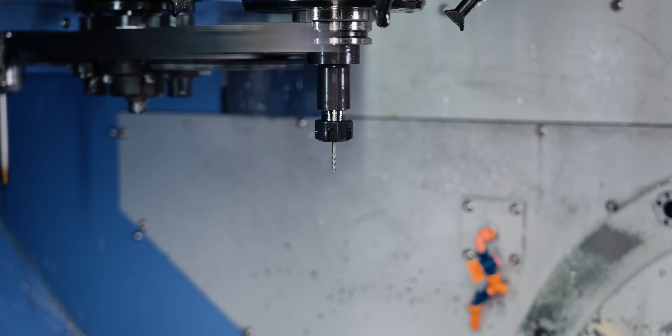What this tool is about to do is going to blow your mind. A lot of machinists are going to look at this feature in this part without watching this video and be like, how the hell did you do this?

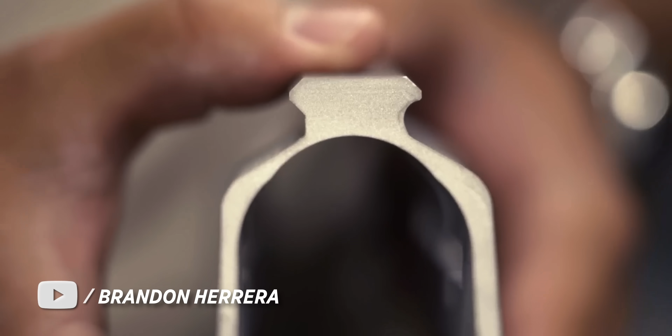This is a cautionary tale of what happens when you don't work with titans of CNC. Look at that perfectly symmetrical Picatinny rail. That's probably usable for something, I guess. Also, the difference in wall thickness side to side is kind of staggering. These cuts are there for a reason, and they're supposed to be in line with each other. They're not. This is potentially usable. I wonder why AK-50 takes so long sometimes? Shit like this. Well, I guess you know what we got to do.

Oh shoot, I still got a program.

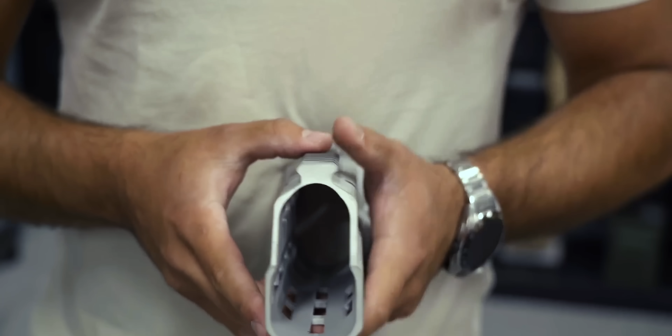Well, as you just saw, the handguard that Brandon has for the AK-50 project is, well, let's just say it's not going to work. So we're going to help him out by making one here on our DVF 5000.

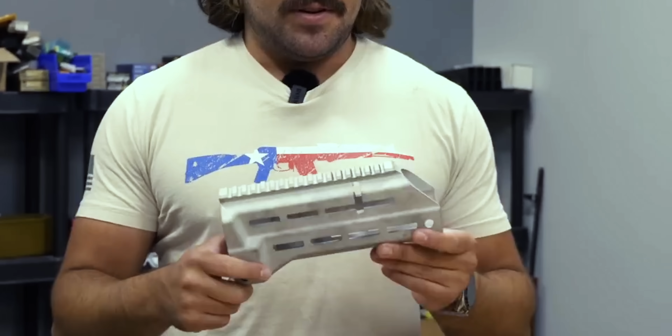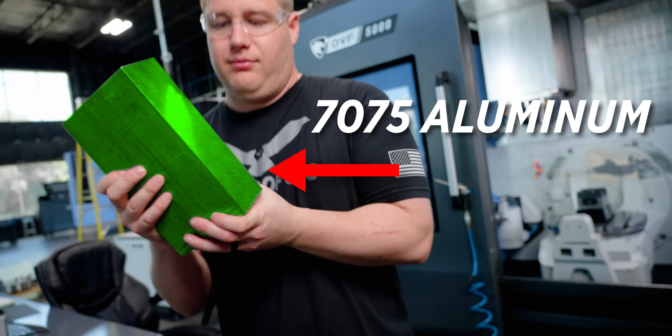Now, when it comes to handguards, this thing is huge. I mean, look how massive this piece of material is. And this handguard is a lot more complicated than your traditional handguards, because normally you're buying these out of extrusions that already have a hole through them and you're just finishing the outside. But this one, we're going to make it out of a solid billet of 7075 aluminum, which is not as easy to get as 6061.

And this handguard has a lot of thin walls, and just the sheer size of it means we're going to have a lot of long tools. We're going to have to really pay attention to our feeds and speeds, otherwise we might end up with a lot of chatter in this part.

This is exactly what I was afraid was going to happen. Dude, you might as well cut, because this is not good.

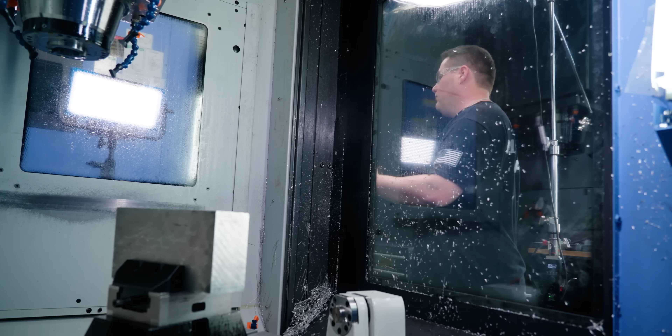So the first operation here is just a material prep operation. We're going to deck the top and the sides. Go ahead and put a dovetail on it.

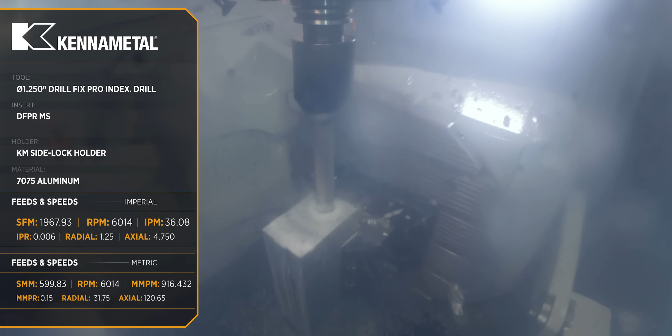Then I'm going to come in with a Kennametal Drill Fix Pro, and I'm going to do some chain drilling to get rid of the bulk of the material on the inside of the part. Now, we're using the Drill Fix Pro because of its centering capabilities. Most indexable drills don't have really good centering capabilities, but the way the insert is designed on the Drill Fix Pro, it allows it to center itself really well, making it good for chain drilling.

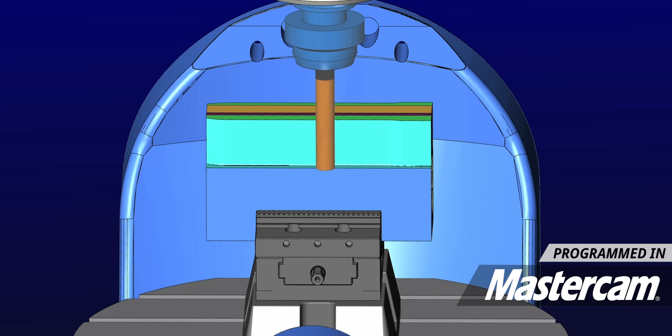So after our drill runs, we're going to come in with a KOR5 and rough the outside. Now, this is just a basic roughing pass. We're just going to get rid of the excess stock that's going to be around the vise for Operation 2, so we don't have a lot sticking up for when we start tabbing the part. So after this tool runs, that's going to complete Op 1.

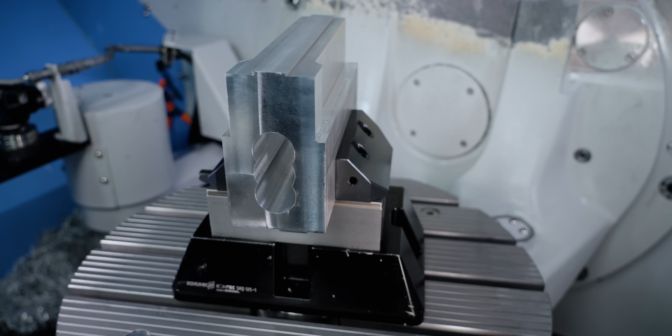After that, we got to take this piece out along with the straight vise jaws and replace them with the serrated jaws. Then we can put the handguard back into the machine, holding it onto the dovetail.

Dude, what are you doing? You're the camera guy, get out of my shot. Yeah, anyway.

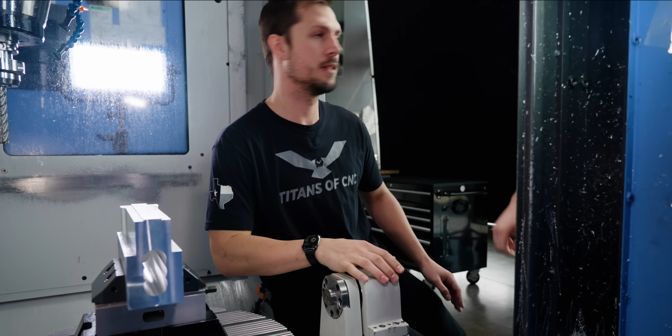Yeah, what he said. We're going to start Op 2 now.

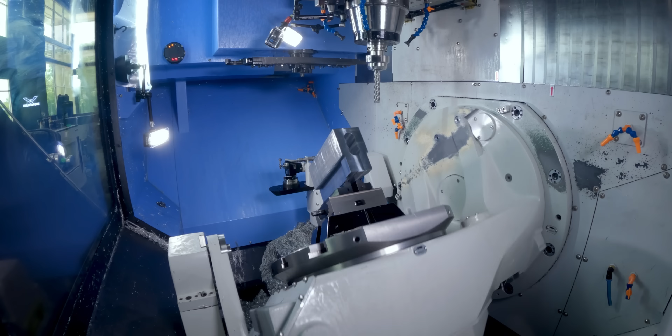Now we're going to start this out by using a 3/4 inch KOR5. Now, this is a 5xD tool. And when it starts roughing the inside, we won't be able to get all the way through, so we're going to come in from both sides and get as much as we can.

Next, we're going to come in with a 3/4 inch duo lock that is sticking out 7.5 inches. Now, we've got to be very careful with this tool because it has a steel shank, so harmonics can build up very easily. That's going to start vibrating the tool, and it's just going to bounce off our material if we're not careful.

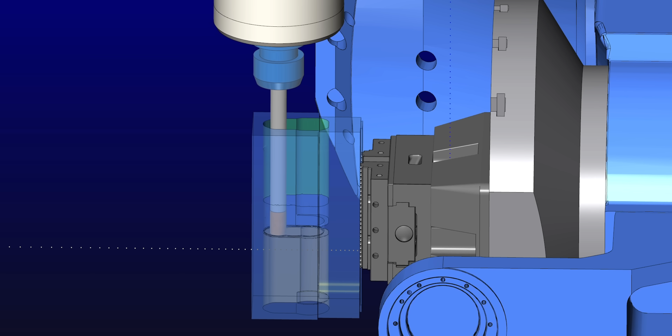Now we're going to drop in and rough away that material that our KOR5 couldn't reach. Normally we always tell you to rough everything before you do any finishing work, because something might end up moving. But in this case, we've got a lot of thin walls, so we're going to rough and finish the ID before we ever touch anything on the outside.

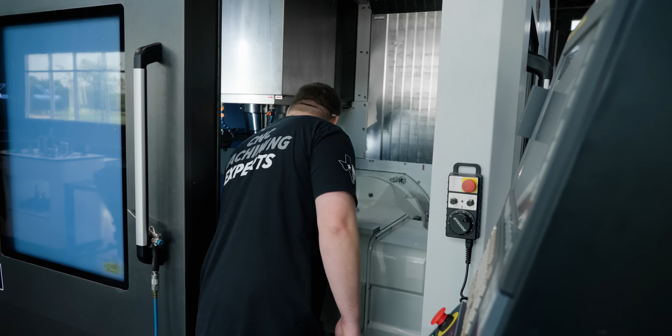This is exactly what I was afraid was going to happen. Dude, you might as well cut because this is not good.

Oh, don't you just love it whenever your boss takes in a job and he's like, oh yeah, we're gonna make this thing perfect, we're gonna hit all the tolerances, send it to us, we got you. Knowing good and well the whole time they're gonna give it to you and it's gonna be your headache to deal with. That's kind of what I'm dealing with right here.

Luckily I've got a machinist for a boss, so I'm about to enlist his help because what I'm dealing with here is typically you could run this tool at 15,000 RPMs, no problem. But the projection on this tool is so long that we're dealing with a lot of harmonics, a lot of chatter. As you can see, this thing looks awful.

Now I called Barry over here and he said he didn't see nothing wrong with it. He thought it was just fine, but we both know that's his signature pattern, so of course he wouldn't see a problem with it. So I need to go get him and see what he thinks about it.

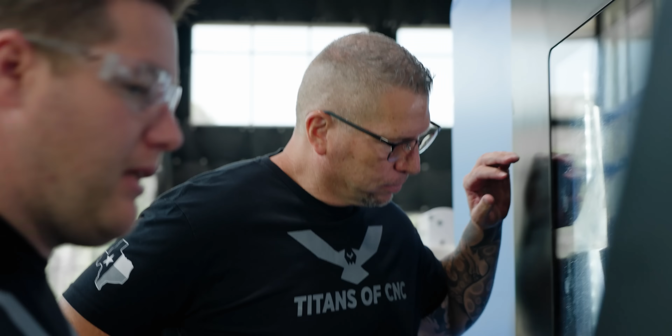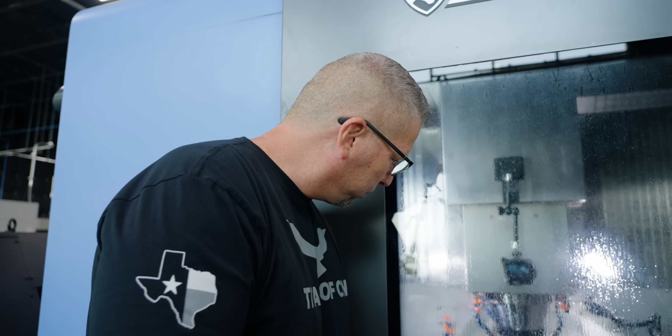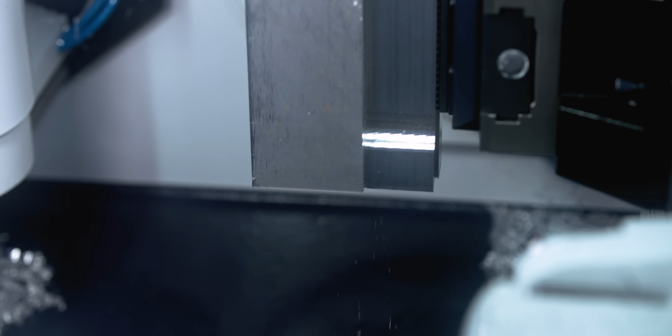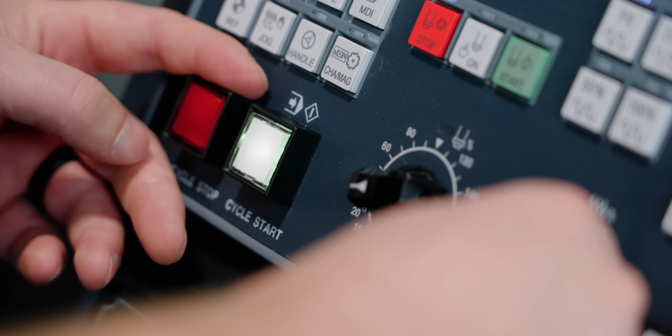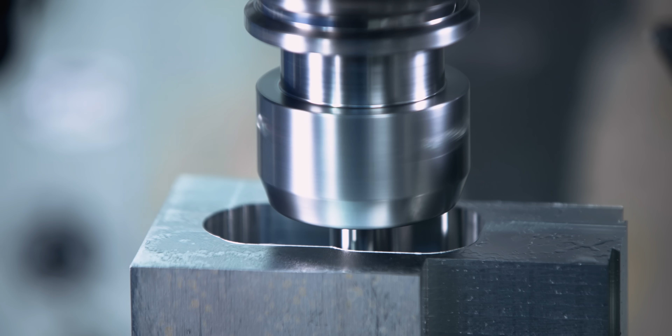Okay, now the ID is finished, we finally made it through that. It's looking really good, but we're not out of the woods yet. Now we have to rough the OD. This is where we're going to start revealing those thin walls, everything's going to get super thin. So when we start finishing this outside, it still could chatter and ruin everything that we've done up until now.

Now that the KOR5 has roughed the outside, now we're going to call up a 3/8 tool and start finishing everything.

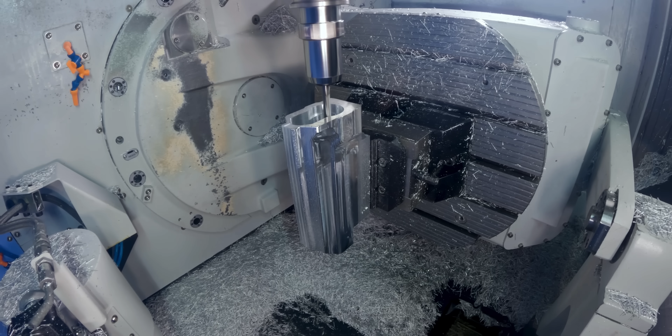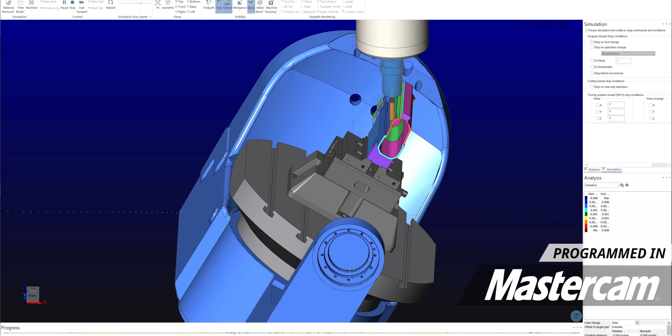Now coming up, we've got a very difficult feature to machine that's going to have several challenges to it. This is where CAM software can make or break you, especially when you're programming on a 5-axis machine. I've got to hand it to Mastercam - I love the direction they've taken their multi-axis modules, because not only are they extremely intuitive, they give you several options for machining strategies. Normally you don't have that luxury when something is that intuitive.

So for these pockets and holes on the face, I'm going to come in with a small drill and drill those out just to get rid of the bulk of the material.

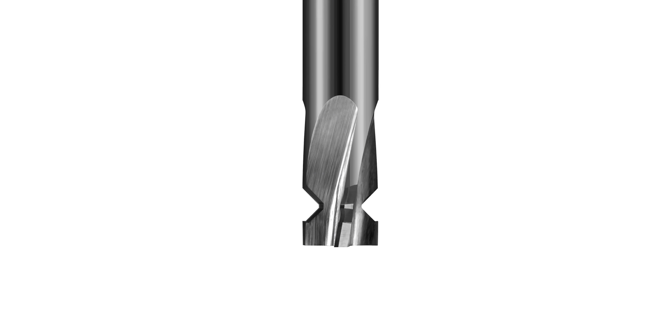Next, we're going to come in with our Picatinny form tool. We could do this with multiple tools, but it's easier, and I know the shape is going to be correct if I go ahead and use a form tool. That makes it so I just have to make one pass down each side and that whole Picatinny rail is complete. All right, next we're going to come in and finish our holes, rough our slots, and do the grooves that's on top of the Picatinny rail.

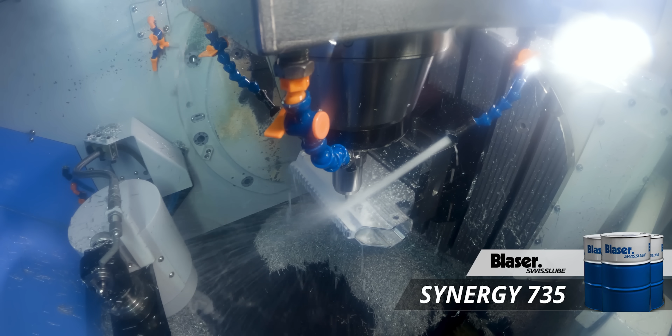Now for this, we're using a 3/16 end mill that is necked back 1 inch. I like to use neck tools whenever I can because it makes the tool so much more rigid. We don't need that whole length of cut, we just need the reach, so in order to keep it as rigid as possible, that's where neck tools really shine.

All right, next we're going to rough and finish those pockets in that face. Now these are just weight reduction pockets. They're not really doing anything.

Next, we're going to call up a 1/4" ball nose, and it's going to finish some of these angled walls and fillets that the 3/8 tool couldn't reach. The 1/4" ball nose can't reach everything because of the design of this, so we're going to come in with a 3/32 ball nose and finish those areas that the 1/4" couldn't reach.

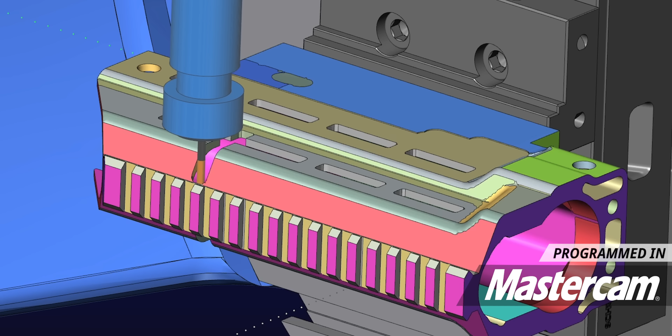So now we're going to come in and finish these slots, which are designed for the M-LOK accessories. Our tool is an 1/8" tool that's hanging out a little further than we wanted to, and that's because this one vertical slot is actually all the way through the part. So we had to stick this tool out a little bit far in order to get that length that we needed for that. So we're going to have to slow things down just a bit to make sure that we don't get any chatter on these slots.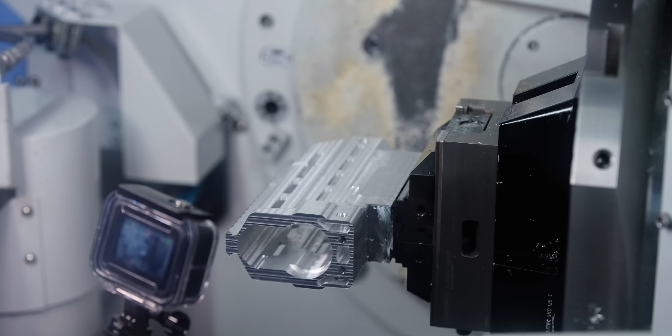What this tool is about to do is going to blow your mind, because the pocket that it's doing is otherwise impossible. And a lot of machinists are going to look at this feature in this part without watching this video and be like, how the hell did you do this?

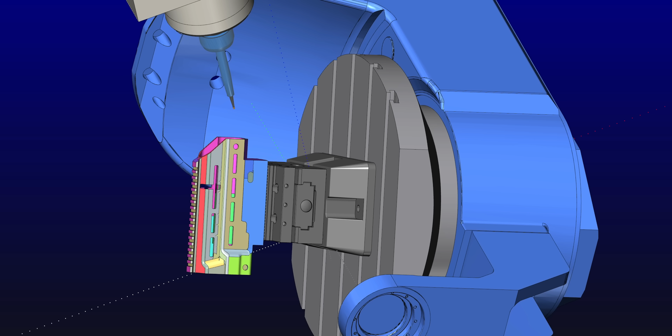I'm going to turn on my transparent mode so we can actually see what's going on with this tool. On the back side of this part, on this angled wall, there's going to be 2 more slots, but these M-LOK accessories need a certain wall thickness. And because of the shape on the inside, we've got a big fillet coming into where that wall is.

So we really need a flat in there to make sure that wall thickness is correct. So to do that, they've added these pockets. Well, the problem is there's no way to do those pockets unless you do them with a key cutter. The problem with a key cutter is the pocket width is wider than what the head of the key cutter can actually reach, because you would have to go through that slot.

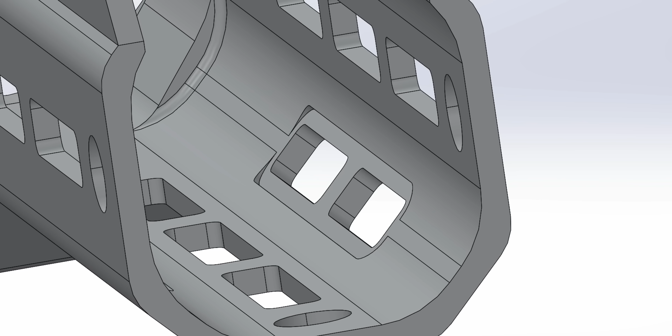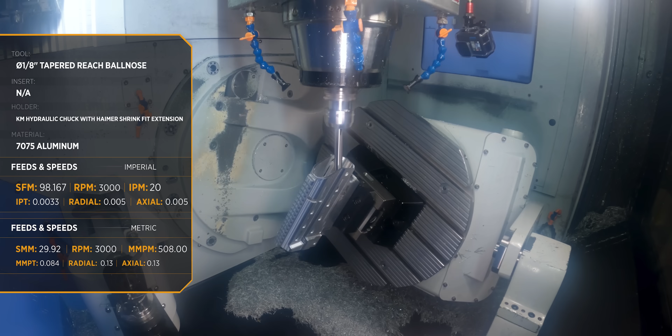So what I did is talk with Brandon and their team about, instead of making this a square shoulder pocket, why don't we add a radius all the way around? That will allow me to come in with this 1/8" ball nose, and as you can see, we're just coming in with vertical passes through this end, and utilizing our 5-axis machine, we're able to put this feature in the part that would otherwise be a real pain to figure out how to do.

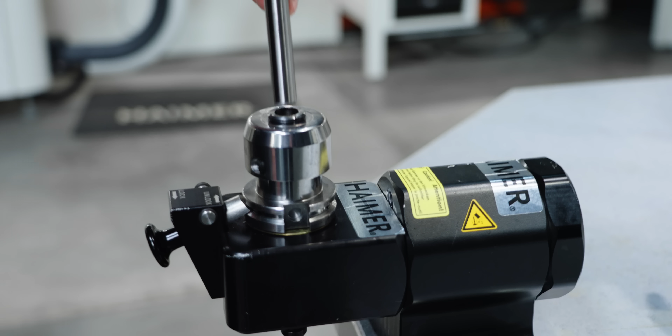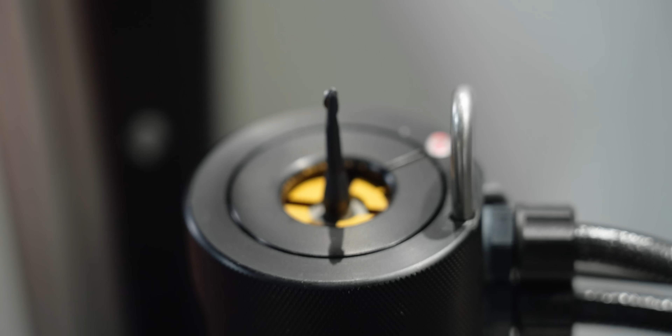Now, another thing that's making this possible is I'm using a Haimer shrink fit extension. Now, I love using these shrink fit extensions because not only can they go into other shrink fit holders, but they offer you a very slim design that allows you to get into tight reach places like this, which you're always doing on a 5-axis machine.

So as you can see, this holder is getting extremely close to the edge of this part, but we're able to stay away from that, and we're also able to reach deep inside the part.

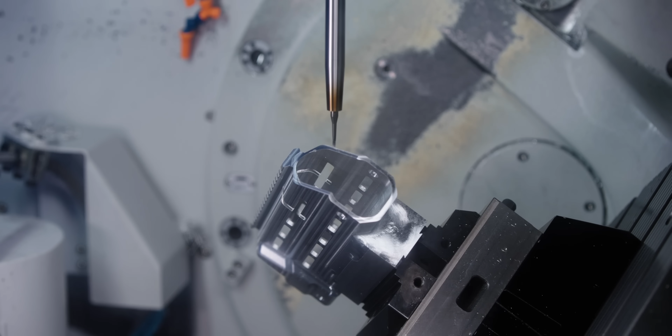All right, next we're just going to take an 1/8" chamfer tool, and we're going to chamfer everything that it can reach on the outside of this part.

Next, we're going to come in with a lollipop tool, and that's going to chamfer the back side of our slots. Because if you've ever worked with me in the past, you'll know that I do not like to deburr anything. So this is going to make sure that when this part comes off the machine, everything has a chamfer, everything is deburred, and I'm not going to have to do any manual work to this part.

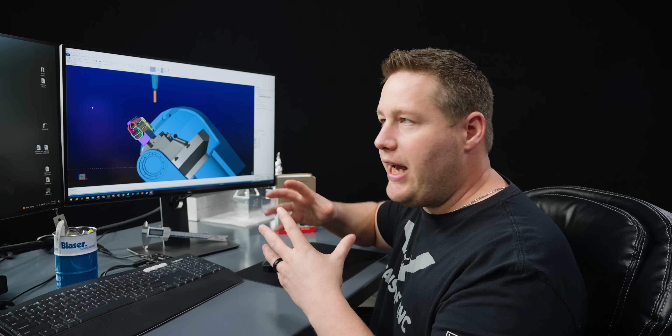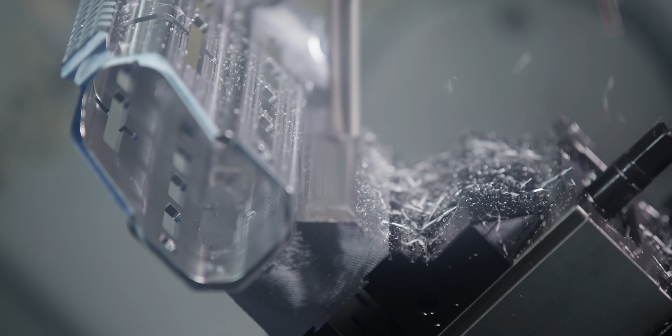So now that we have everything finished on the top side, now we can start roughing away this material that's on the back side of the part. Now, we've left that on here this whole time to make sure that we have rigidity in this part when we're finishing all of this stuff on the top.

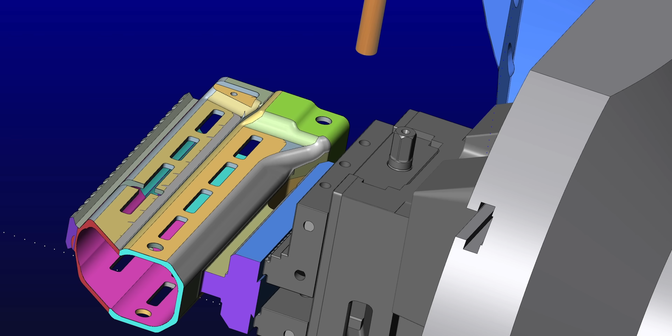But we're not going to take it all the way what we should. We're going to leave some there to make it rigid for when we finish this angled wall. We want to kind of take this down in certain sections. That way we still have rigidity, but we get this entire back wall finished. So once we've rough and finished as much as we can on the back wall, we're going to come in and make a slot in the center to reveal our 2 tabs.

Once we do that, the only thing left to do is come in and make these tabs to the thickness we need to break this thing off. For that, I'm making it 30 thousandths thick. After we do that, Op 2 is complete, and as you can see, we've almost done this entire part all in one operation.

Oh man, this thing is looking amazing. I'm not gonna lie, if Brandon ends up anodizing this, I'm probably gonna get my feelings hurt a little bit.

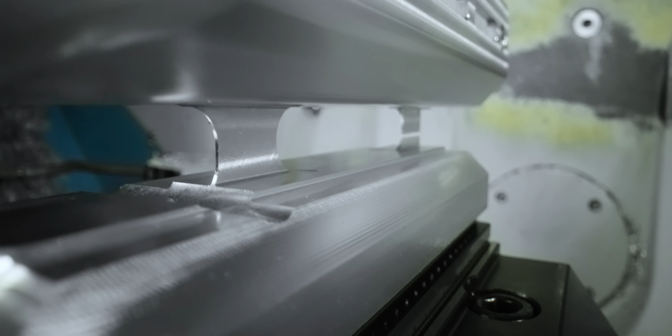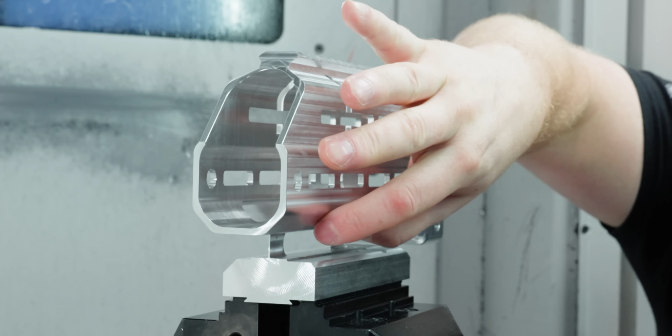We were able to use the tabbing method from my previous video to get pretty much 99% of this part complete. The only thing left is the M-LOK slots on this back wall and this angled wall. But as you can see, we've got that 5-axis wiggle going - check this out. We're only holding on with 30 thousandth thick tabs. That's all that's holding this part on.

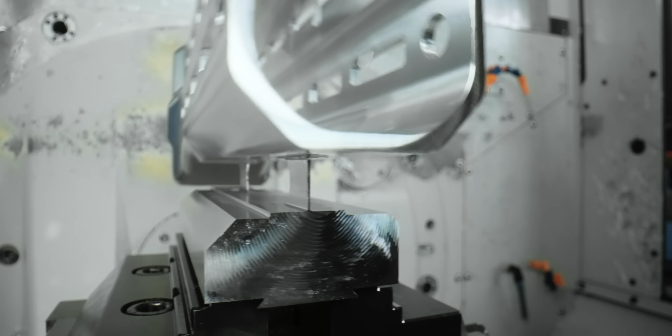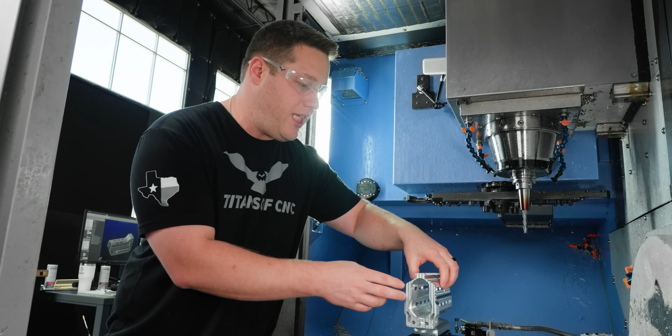So for this third operation, I'm gonna change these jaws out and hold on this wall right here. But we've got some super thin walls here and I don't want to crush my part. We need to make a block that slip fits on the inside of this to keep the vise from crushing our part. I want that to be a good slip fit - not too tight where it presses in, but not too loose, because then the vise can start distorting our part.

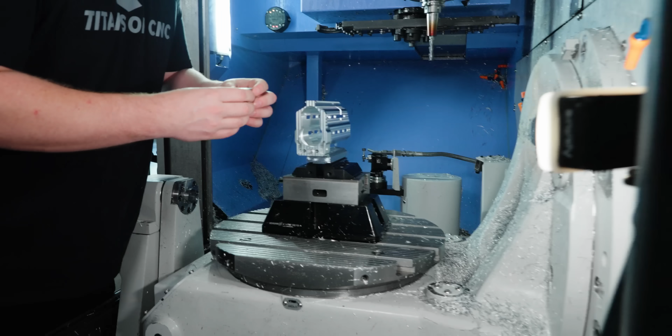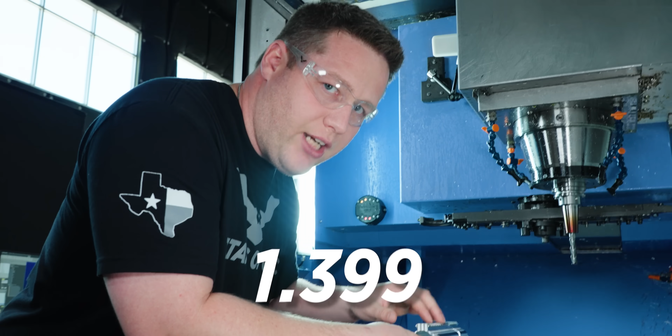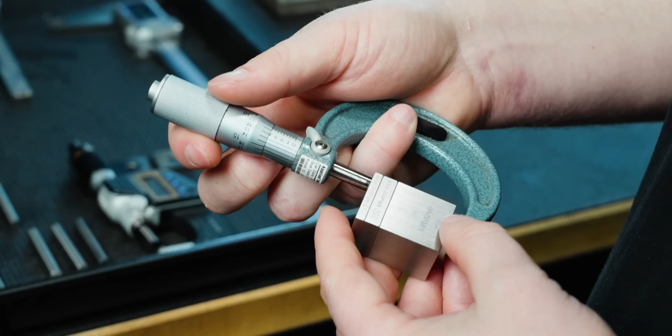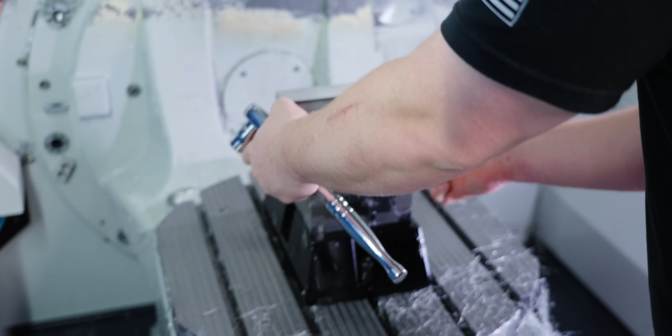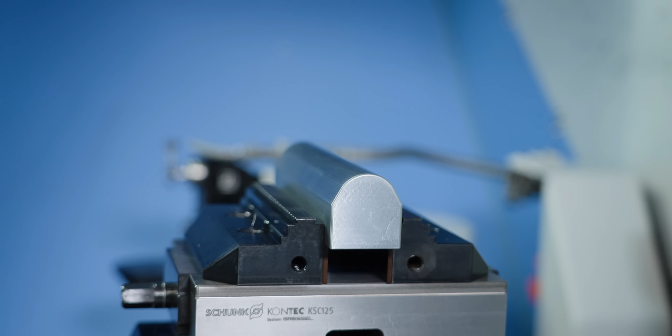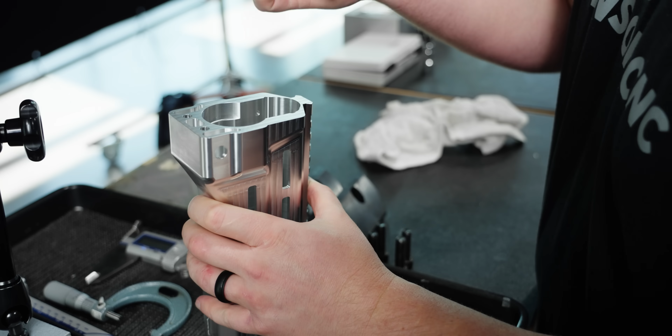Now we're going to check how this fits in our part. It's a good thing we ran that lollipop cutter, because otherwise we'd have real trouble getting this to work - we'd have burrs all down inside of here. Just going to slide it in like that.

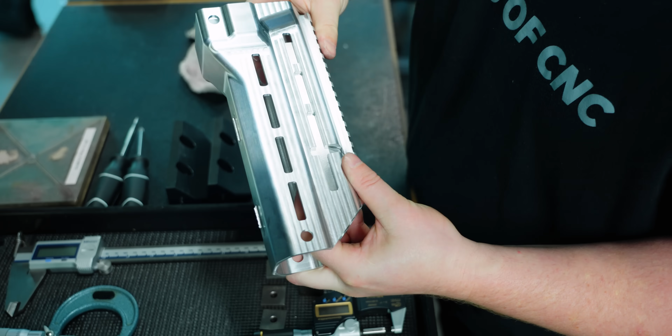As you can see, it sits right inside of there. There's really no play - I don't feel it wobbling back and forth, so that's good. It's a nice slip fit inside this bore, so now when we clamp, we know we're not going to crush our part or distort it, so when we start machining on this side, it's not all oblong and distorted. Now we're going to get these jaws changed out on our vise, get this last operation done, and get this part shipped.

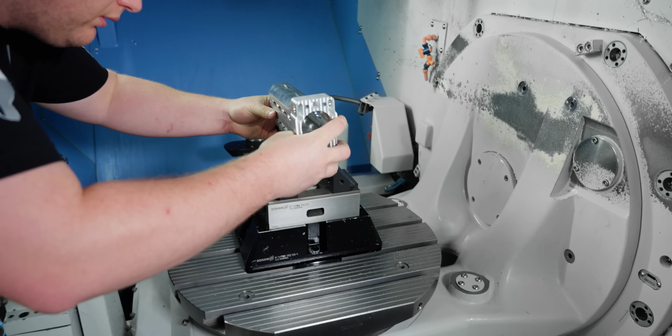For Op 3, all we've got to do is come in and do some more slots and this one hole. We're going to follow the same exact process we did on Op 2, but this time I don't really know how much it's going to chatter because everything is so thin, so I'm not going to get as aggressive with it. And this part is done.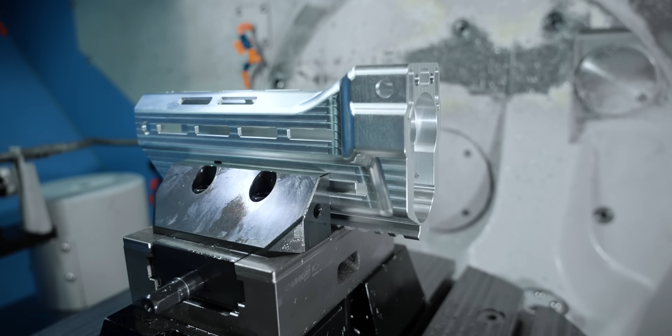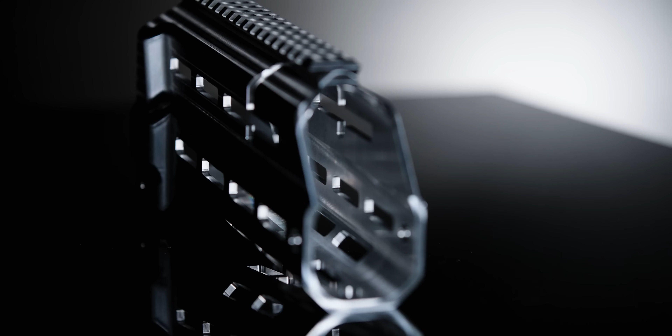Making this handguard has been extremely fun, but it's been a little bit stressful because this part being so big with these thin walls and long tools, it hasn't been the easiest to get good finishes that we normally get. But overall I've had such a fun time making this part.

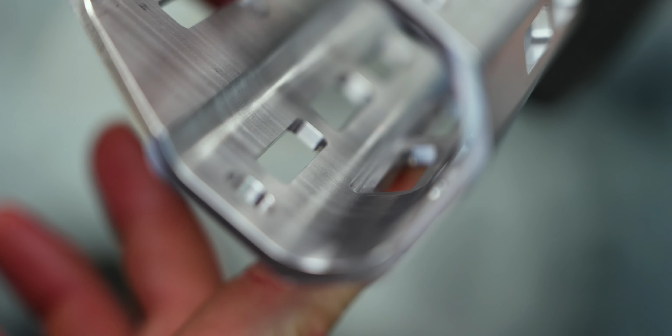Dude, check out these internal pockets here - those came out so nice. I'm really glad I was able to put those in there, because Brandon wasn't sure if we'd be able to do it or not. I'm really glad we found a way to be able to put that in there.

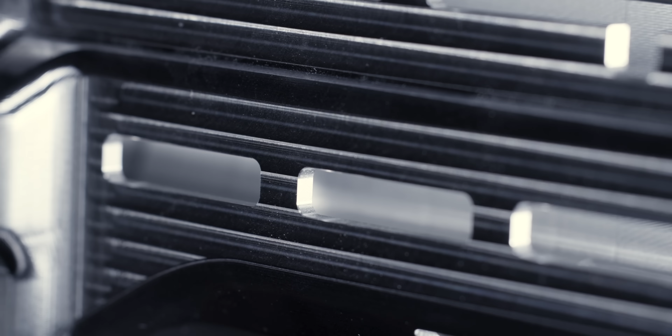Now I gotta say, I'm extremely proud of this part. It came out so good. Normally, very long tools and thin wall parts do not mix. I gotta give some props to Brandon and his team on the design of this handguard. Even though it wasn't the most manufacturable, this thing is super cool and it's gonna look badass when it's all put together.

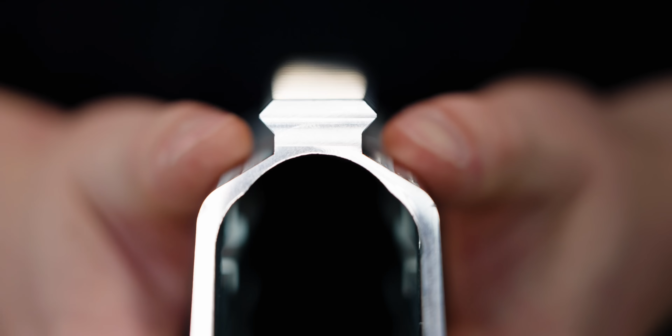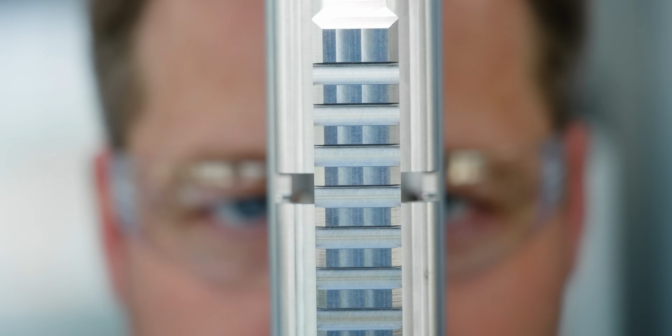Now you can see that our Picatinny rail is symmetrical on both sides. If we check this wall thickness, I'm getting 128, 128, so that's right. Now the last is our slot going all the way through here. From my calibrated eyeball, that does look like they are straight across from each other.

But that is the good thing about running this on a 5-axis. I did do it half and half, but since I did it in the same operation, I can pretty much guarantee that this slot is in line with the other. So at least that fixes the issues with the part that Brandon had.

Now as for the rest of it, I really don't know if it's good or not. So for that, we're gonna have to send it over to Travis.

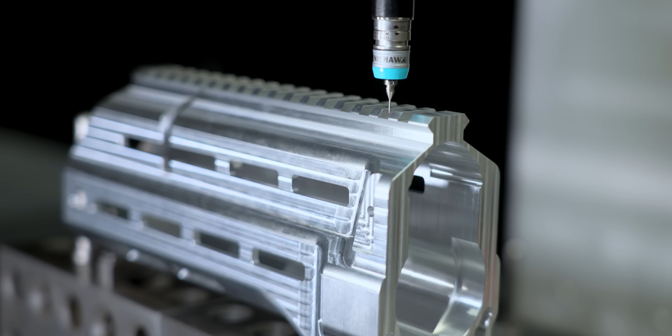Now again guys, this is not to throw shade at that other shop and say hey, look at us, we're better than you. But this is a perfect example of what could happen to you if you put out this type of quality. It's not a bad thing if you scrap a part internally, but a part like that should have never made it to the customer. If you do something like that and somebody else swoops in and says, hey send me that part, I can make it perfect, you just lost a customer. So you have to have a good quality management system in order to keep things like this from happening.

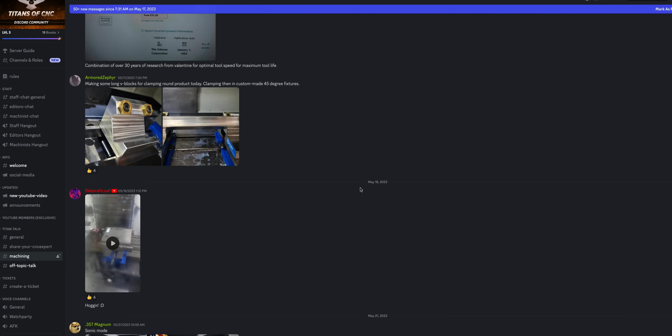Now don't go anywhere, because at the end of this video, Barry's going to hand deliver this part to Brandon Herrera's team. So you don't want to miss that. Thank y'all for watching, we'll see you next time.

All right guys, I just got this out of quality. Travis says it is perfect. So I'm gonna go try to find a box so we can get this thing shipped today.

Oh my God, oh God. Oh no, oh no, no, no, no, no, no, no, no, no. Okay.

Man, you know, it's kind of funny where machining might take a person. One day I'm assembling parts at my grandfather's shop, next thing you know I'm on a beach in Hawaii FaceTiming Titan Gilroy. Now it's Saturday morning, I'm over here visiting with Brandon Herrera's guys, dropping off another AK-50 part. Wednesday I got to run the Gas Monkey garage. It's tough, but there's some things I'll volunteer for.

What's up Zach? Hey, how's it going bro? Happy Saturday. Oh man, so this was the original handguard that I saw Brandon talking about in the video.

And, you know, the quality of this part looks like something I would expect out of Jesse. A lot of chatter, a lot of mismatches, so hopefully the one you got here today is better. Jesse still made this, and he's just a toxic mullet-having hillbilly, but he had me and Titan over his shoulder the whole time he was making this, telling him exactly what to do for every operation. So let's see if you like this one any better.

All right, I'm sure it's better than anything we could do. Well, it should at least be better than what Jesse can normally do.

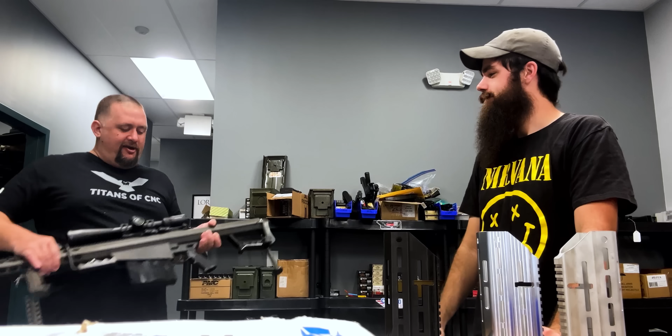So, you know, as I was standing here, I had an idea. I've seen a lot of Mr. Beast videos where like they'll have a car or something, and the last person to take their hand off of it gets to keep it. So I kind of feel like we ought to partner up and do a video like with this Barrett, say. Just stand around for a few hours until everyone else gets tired, and then I get to take this sucker home.

Well, I mean, you got to get paid for the handguard somehow. But, that's true, that's true. I could sleep here, we got AC here. I keep my hand on this all day. You know what? Never mind.

Oh man, it's good to see you again. Thanks for the opportunity to help out, and we'll see you again soon, I'm sure. Right on. It's craftsmanship right there.